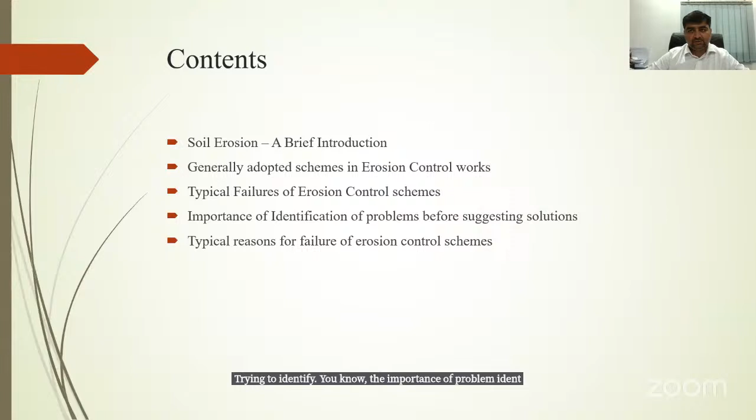So I'll be briefing about soil erosion in the beginning, and we'll be focusing more into the technical things, where we'll be discussing the different reasons for soil erosion, what are the different generally adopted schemes for erosion control mainly in India, then we'll be discussing a few cases of typical failure of erosion control schemes that we often observe in our projects. Along with that, we'll be trying to identify the importance of problem identification before we suggest any kind of solutions, and will also be focusing on the typical reasons where erosion control scheme measures taken on a project generally result in failures.

So we'll start with the basic things, like what is soil erosion. As you can see in the picture, it's a process where detachment and transportation of soil particles occurs by different agents such as wind, water, and gravity. In general, soil erosion occurs due to one or a combination of wind and water, typically in the case of embankments, where due to soil erosion, soil mass is lost from the embankment, detached and transported to other locations, which results in the formation of gullies and cuts into the embankment. This gives birth to a newer geometry which might not be stable to the projected planning, and that might result in overall slope failure. So this is the brief about soil erosion.

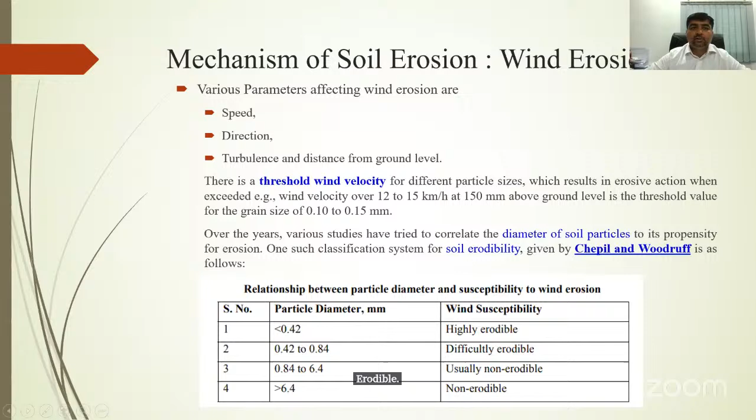Now, the mechanism of soil erosion is crucial in case of wind erosion. Typically, there are three modes of soil transportation: saltation, surface creep, and suspension.

In case of saltation, when you have uneven surfaces and turbulent airflow, the air tries to lift the particles, involving bouncing and jumping within the air. Surface creep involves slow movement of soil surface particles. Typically, in both saltation and surface creep, the range is 50 to 500 micron, that is 0.05 to 0.5 mm. Whereas in suspension, the particles themselves move with the air mass, and the particle size is typically 0.1 mm.

Whatever I'm presenting here is based on the RDSO guideline for erosion control, so I'm taking direct reference from that literature. I'll be sharing different available literature in the Indian context.

Coming back to erosion using rain. Rain erosion is where rain droplets, during precipitation onto the slopes, cause transportation of soil particles due to rainwater. When rain droplets fall onto the top of the slopes, they tend to remove or loosen the soil particles, resulting in movement of the soil particles.

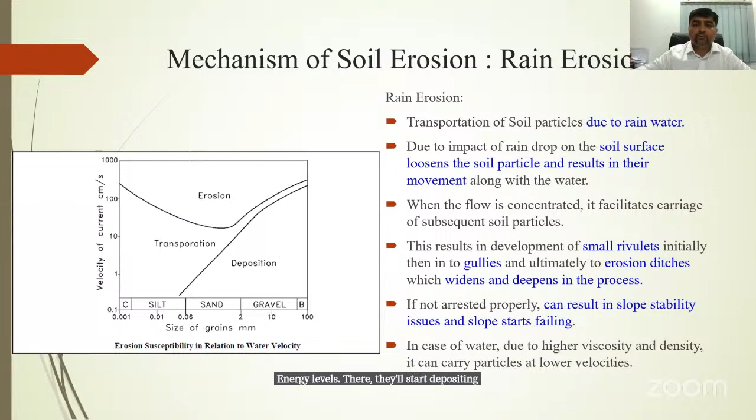So this is the basic about rain erosion. When we talk about rain erosion, we can divide a particular slope into three phases. First phase is the zone of no erosion virtually, expected not to erode because you have a front portion with a good amount of soil mass present. The middle portion would typically be the zone of active erosion. Whatever erosion occurs in this zone gets deposited into the next zone, and if continuous rain is there, the soil mass after deposition can move along with water into the nearby channel. This process typically continues as long as the erosion phenomenon continues. So this is about soil erosion.

Now soil erodibility is one of the major concerns. Soil erodibility is nothing but the susceptibility of a given soil to erode under the given erosiveness of the rainwater. If we have a low intensity rainfall, the droplet diameter would be around 1 mm or less, and the kinetic energy through which erosion occurs would be very less. However, when the rainfall intensity increases to a great extent, say 100 mm per hour, the energy goes from just 2 joules per square meter per hour to around 3000 to 4500 joules per square meter per hour. This is the critical factor.

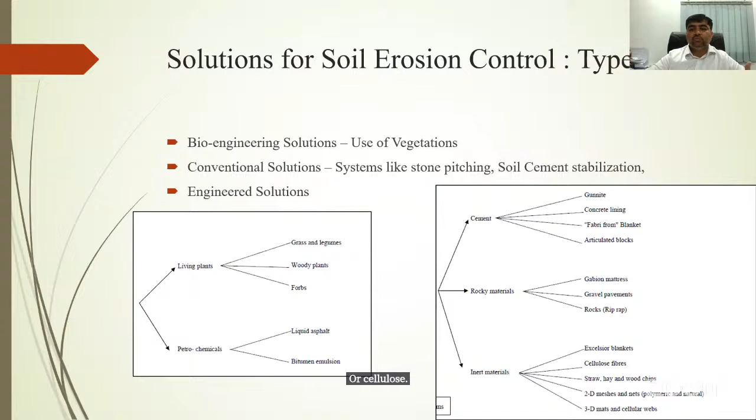There are a few inert materials which can be used, like 2D mesh or net or cellulose fibers. So those kinds of inert materials can also be used for erosion control schemes.

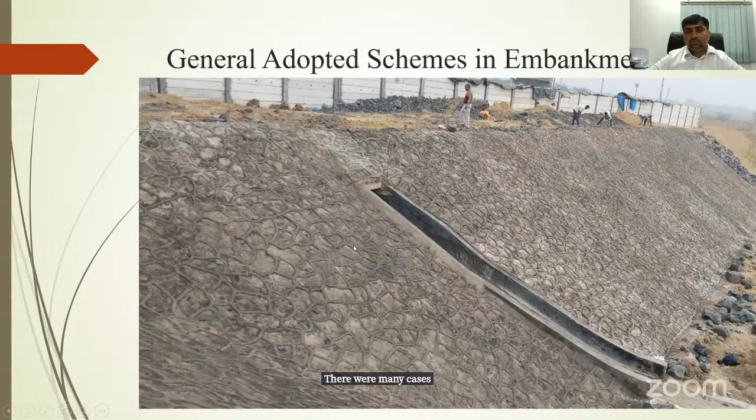So some of the generally adopted schemes, as we all know, include a kind of cemented pitching, which was used. There were many cases where probably this would not be suitable; we'll be looking into one of the case studies. Then you can have the vegetative facing, where we can have this kind of embankments.

Then we can have embankments with typically long slopes onto a landfill. I have taken this photograph just to demonstrate that we can have the coir mats which can be laid over the slope, or we can have the geotextile laid over the slope, or we can have the geomats laid over the slope.

When the slope is steep, we can probably go with the geogrids to make the slope stable. When you have any kind of vegetation, and when your slope stability is a concern, definitely you'll have to go with the engineered solution. So this is one of the options that we can take.

Nowadays geocells is also one of the common techniques being used in India. But unfortunately, when these are placed, many times failure occurs due to various reasons. One is, when you have very steep slopes, the soil gets eroded, and the geocell becomes empty on the top, and that kind of thing occurs many times within geocell. You will have connections, tie clips would be there, which would get detached, and a complete portion of geocell would get washed away in that way. So those kind of issues are there. I hope soon those things would be either addressed or replaced with some other technology.

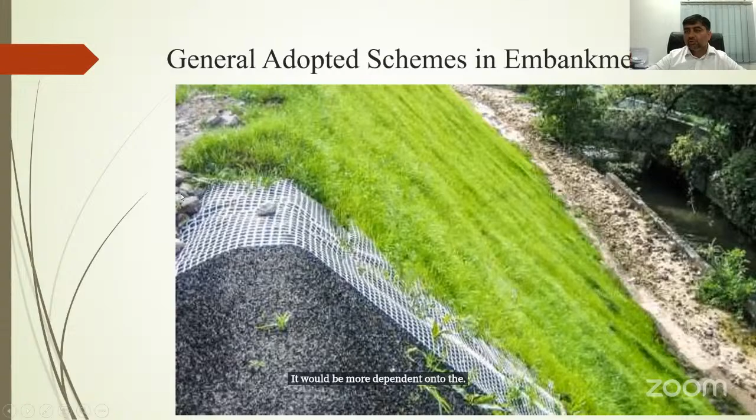These are typical gabion mattresses, you can say, which are being used, which are being adopted.

Now we'll be looking into a few of the typical failure cases where erosion control schemes were adapted, but due to one or more reasons, the applications were not understood properly. Even though a good amount of pitching was done here, this is a typical case somewhere down in south where this kind of closed pitching was done. There was nothing wrong with the technique that was adopted. The only thing was, it was understood that the slope is one vertical to 2.5 horizontal. Material used was typically core was clay.

Then you had a kind of sandy material on top of the core, and then this pitching was done. So this should be stable. And if you are doing basic engineering, not doing anything else, probably that slope should be stable. But whenever you are using anything within it, you have to be very, very careful.

In order to make this particular slope stable - this was an STP plant, so this was the lagoon of the sewage treatment plant. They wanted to make it impermeable. When you are trying to make it impermeable, typically the available option is, let's say, geomembrane. When you're using the geomembrane, you have to be very, very careful, because in this particular portion, they had clay at the base, then they installed geomembrane, then they again placed the clay.

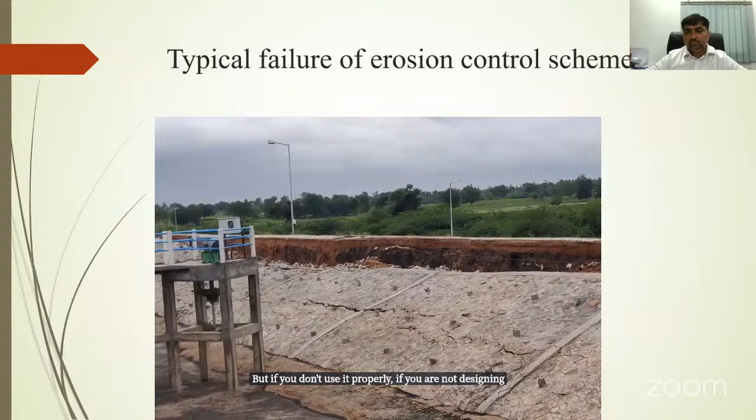So practically they made it a kind of zero friction value at the interface of geomembrane and clay. And when you do that, whatever erosion control scheme you are making is of no use, because in principle you have made this embankment in such a way where it can simply slide onto the geomembrane itself. So geosynthetics, which we use, is definitely one of the best materials or best technologies we have. But if you don't use it properly, if you are not designing for the purpose, it could result in failures.

So this is again the same project at a different location. This was the central one that was on the end - this was at the edge, and this particular photograph is at the center. This is the center bund. And again, you have the failure of riprap. You have a huge settlement. You have almost sliding along this line.

When we say we're designing an erosion control scheme, the point I want to make is that erosion schemes often come in combination with other schemes. It's not just erosion. If we talk about slope stability, if you have a slope of 1 vertical to 1.5 horizontal, typically practiced in India in highway projects, that's about 33.5 degrees. If the material you're using has a friction angle of, say, 31 degrees, and you place it at 33.5 degrees, in principle, for cohesionless soil, that has to fail. You cannot prevent failure even with geosynthetic solutions if the slope interface itself is not stable.

In most highway cases, people simply use geocell and put in material with a high phi value, say 30 degrees. In most of these cases, the whole erosion control system suffers and gets washed away.

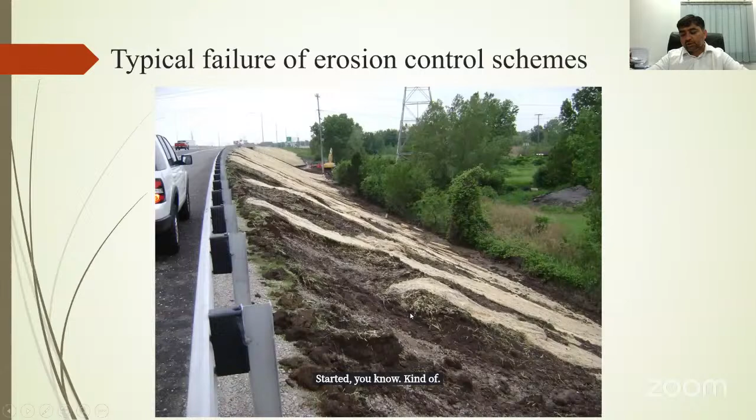Now if we look at this photograph, we have to understand that this failure has occurred. The probable reason for failure of this roadway is erosion. But can I put any kind of erosion control scheme just to make sure it's okay? You can see they had this earthen flat portion available, then the slope. This was the original scheme, which had ample vegetation.

But within this zone, we need to ensure there is a proper retaining system. The slope was steep, so it has to be stable. If you don't have a stable slope and you construct something on top of it, you're obviously going to end up with this kind of accident. That's where we need to understand the importance of identifying the proper problem and then suggesting the proper solution.

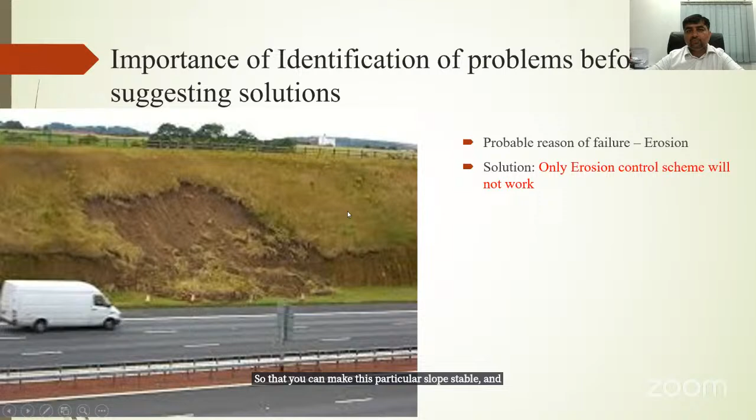This is another similar case where the highway is there with a good amount of vegetation already present. There's another small boundary, and because this slope is steep, this portion gets washed away during erosion. We have to understand that this mass might not be stable with just vegetation. You need some kind of reinforcement within this zone to make the slope stable, so it's good enough for its serviceability life.

Again, this is one area, one portion, where you can see vegetation in the nearby area on this side and that side. This is a quite gentle slope in a way. But when you have this kind of valley on the other side and this kind of curvature on both sides, they have probably met at this embankment. When you have this kind of embankment with a valley on both sides, you cannot have a normal embankment design.

You have to go with some kind of proper analysis for the slope stability, for proper toe protection, erosion control scheme. Only an erosion control scheme is not going to work in this kind of system. You have to be sure you involve an expert in your project.

The main pain contractors have nowadays is whenever they have this kind of embankment, they'll say they have done everything perfect - executed the work well, the surfacing is good, everything is very well. But because of erosion control and maintenance issues, they are always suffering, and LD is being imposed onto the contractors just because they have not done the proper erosion control scheme. Probably they involved some designers or experts, but those experts might not have considered the severity of the region they are dealing with, or the expected conditions. If they are not considering the application properly, they'll end up with these kinds of issues.

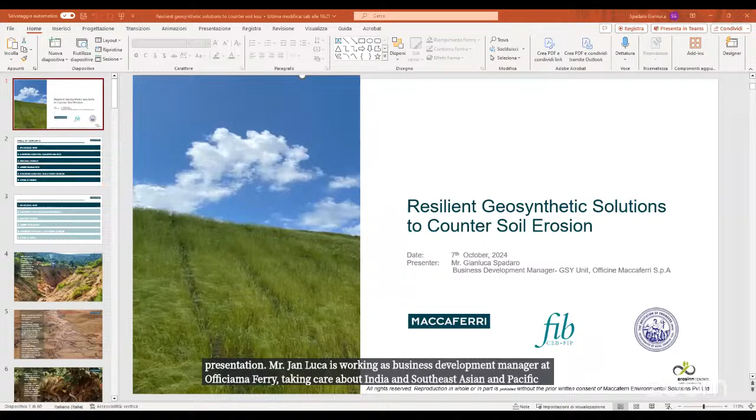Thank you for the introduction. Let's go ahead with our presentation. We will focus our attention today on erosion induced by rainfall and consequent runoff. We are not touching wet application. It means erosion induced by water flow.

After a brief introduction on soil erosion process, we will recap briefly the different types of geosynthetics used in erosion control applications, included in the relevant ISO norm, ISO 18228 part 8, to have a quick look onto our range of solutions. Then we will go deep into the research commissioned to the University of Milan and other research carried out over the years by our company, in order to identify the relation between erosion control products and vegetation growth, and to identify the main factors affecting vegetation success on slopes.

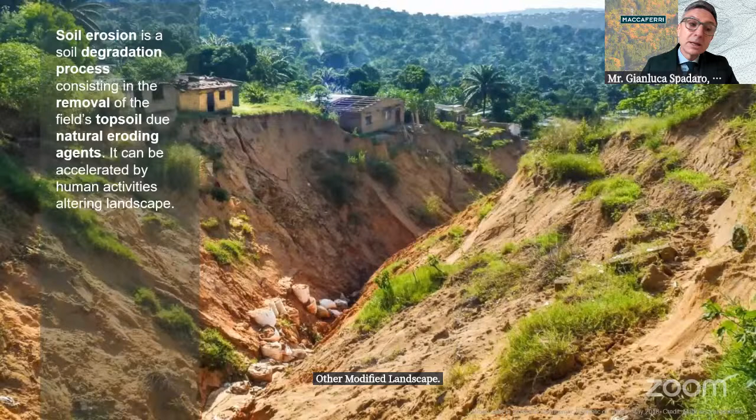Soil erosion is a soil degradation process, as has been mentioned before, consisting in the detachment of the topsoil due to the action of natural forces. Once detachment occurs, soil particles are then transported away. Natural erosion occurs typically on a geological timescale, but when human activities modify the landscape, the erosion process can be greatly accelerated.

As mentioned before, we will focus our attention today on rainfall and runoff induced erosion. Water and wind are the two most common causes of soil erosion. Rainfall may generate the displacement of soil particles close to the soil surface due to the impact of raindrops, and runoff can cause the carving of small rills and channels on erodible soil. Finally, strong winds may bring fine soil particles into suspension and cause movement by bouncing and rolling of coarser particles.

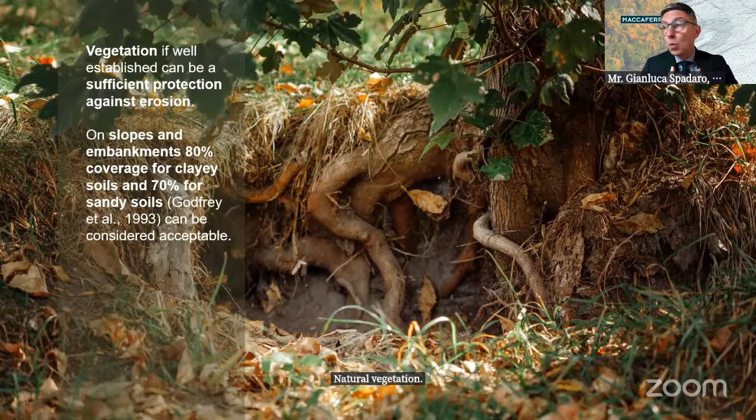Natural vegetation, if well established, is usually considered sufficient protection against erosion. Vegetation coverage is typically able to protect topsoil from the action of eroding agents, and plant roots are capable of holding vegetative soil in place, preventing it from being blown and washed away. Based on literature data, a vegetation coverage of 80% for clayey soil and 70% for sandy soil can be considered acceptable protection against erosion processes on slopes and embankments.

The requirements in terms of vegetation coverage mentioned in the previous slide may be difficult to reach on site. And even if reachable, there is anyway a time window until the full development of vegetation, during which the soil is at risk of erosion in case of intense rainfall. A paper from Rickson and Loveday reports that the full establishment of vegetation may require one or two growing seasons in temperate climates, even longer on harsher sites. In tropical conditions, full revegetation on a slope may take considerably less time.

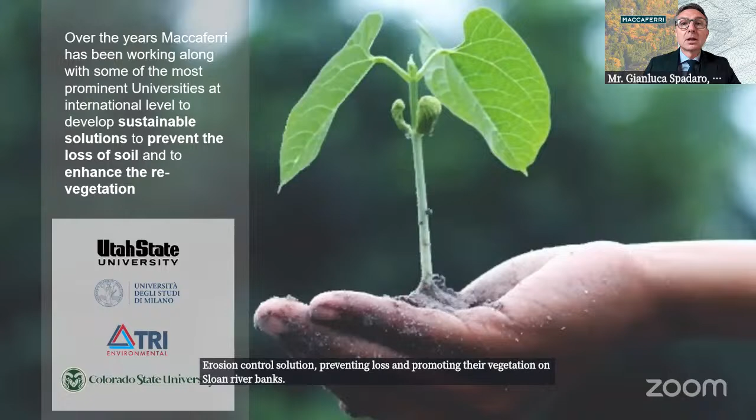That's the reason why erosion control products made from synthetic or natural organic fibers are frequently used in protecting slopes from erosion and creating favorable conditions for the establishment and development of vegetation. Over the years, our company has been cooperating with some of the most important universities and testing institutes to develop sustainable erosion control solutions, preventing soil loss and promoting revegetation on slopes and riverbanks. Along the presentation, we will go through the most relevant research and studies.

Let me go through quickly the classification of erosion control products according to the relevant ISO norm, ISO 18228 part 8. Geosynthetics addressed to erosion control applications can be classified mainly based on product configuration, and then we may have GeoMat, GeoGrid, GeoWeb, and woven material in form of sheet material.

Raw material can also be classified based on the raw material from which they are made, and basically erosion control products can be classified based on natural fibers, typically jute or coir are the most commonly used raw materials, or artificial synthetic fiber, typically polypropylene, polyethylene, and polyamide. Finally, geosynthetics used for erosion control applications can be classified based on the duration of the protection against erosion, as permanent or temporary. So it means it can be classified under permanent erosion revegetation materials, PERMs, or temporary erosion revegetation materials, TERMs.

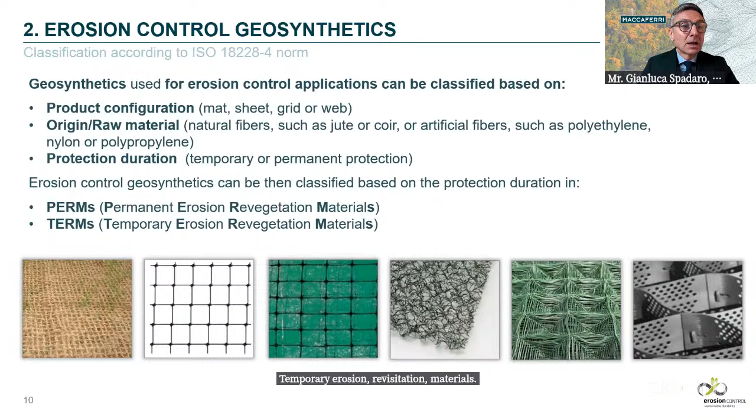Let's focus attention on the permanent one. Permanent erosion revegetation materials provide permanent protection against erosion, being manufactured using synthetic material, as we have seen before.

To avoid any misunderstanding, when we refer to the permanent action provided by PERMs, we refer to the action that can be provided by this type of material when properly filled with topsoil and shielded by the vegetation from the degradation due to UV radiation.

PERMs provide permanent protection against erosion, provide support in vegetative growth, creating favorable conditions for the development of vegetation, and if well entangled with the vegetation, this provides also a reinforcement of the root system in terms of improvement of the shear resistance.

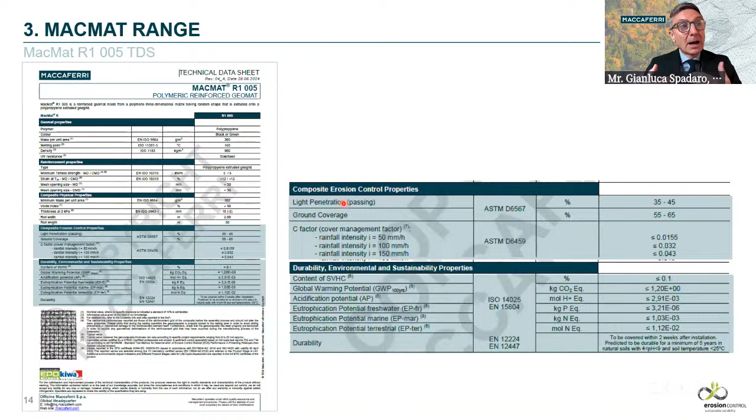Ground coverage is something correlated to light penetration, because you can understand easily that an open material may provide a high value in terms of light penetration, ensuring the passage of a big portion of UV radiation, but at the same time, an open material may have a limited ground coverage and then a limited capability to protect the slope from erosion. So a proper balance between light penetration and ground coverage would ensure the best performances in terms of erosion control.

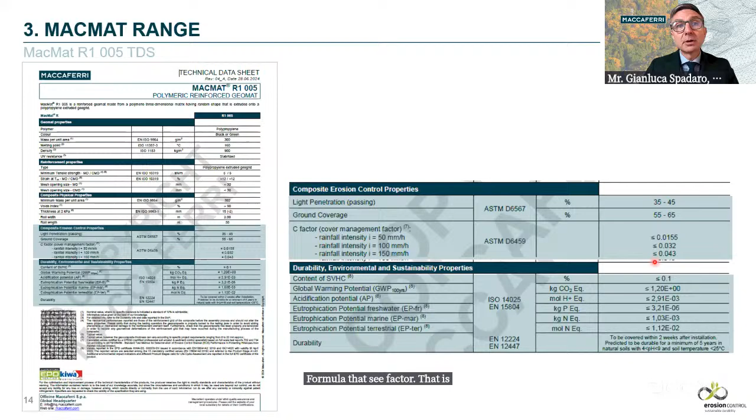And then we will see later, when we go through the RUSLE formula, the C factor that expresses the capability of the material to protect the slope from the erosion induced by rainfall and runoff.

And then finally, we will have also the environmental performances, since we are called to develop solutions that are sustainable under an environmental point of view. The environmental performances of our solutions have to be independently verified and provided under an environmental product declaration.

There's a document communicating in a transparent and comparable way the information about the life cycle environmental impact of the product according to the relevant international standard.

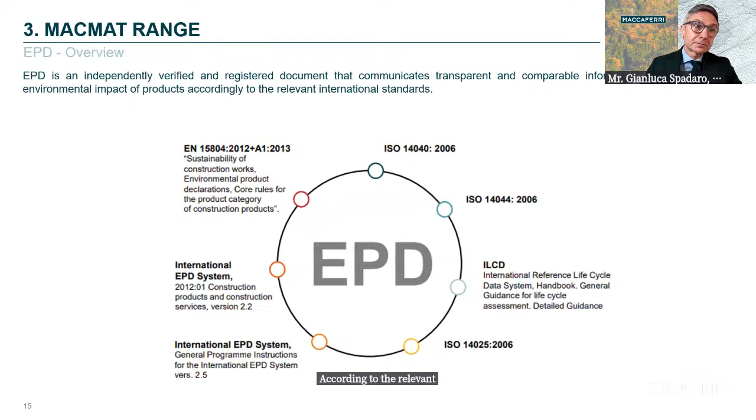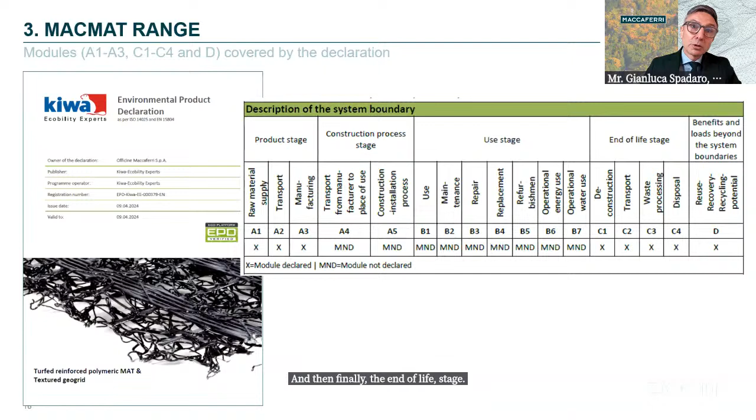That's the environmental product declaration covering our product, providing the environmental impact of the product, referring to the production stage related to raw material supply, transportation, and manufacturing, and then finally the end of life stage and the benefits and loads beyond the system boundary at the end of the life of the product.

Let's have a quick look into the research we mentioned before, carried out by Maccaferri along the years in order to develop sustainable solutions, preventing soil loss and promoting the establishment and development of vegetation along slopes and river banks. Which are the main factors influencing the establishment and development of vegetation on slope and embankment?

The study identified 7 product-related factors influencing revegetation success, and 4 site-related factors. Product-related factors are light penetration, thickness, color, water absorption, weight, roughness, and uniformity. The site-related factors are albedo, water runoff, soil humidity, and soil temperature.

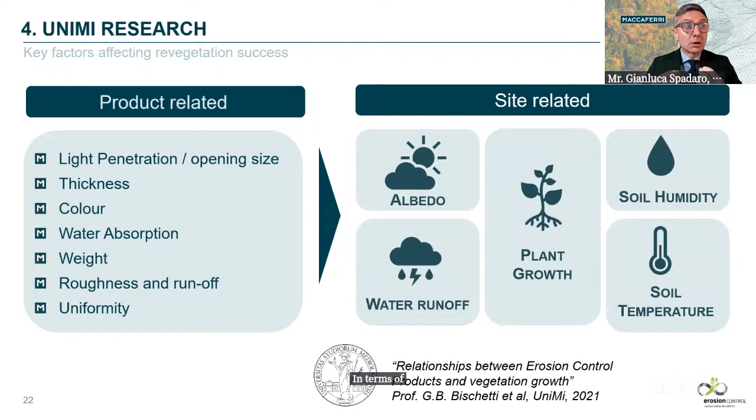The performances provided by an erosion control product refer to complex processes resulting from the interaction of many different factors and features interacting with each other. It's the balance between these factors that provides the best performance in terms of vegetation growth, not the huge value of just one factor.

Erosion control products have been divided along the research into 4 categories: bionets, light geogrids, geomats, and geoblankets, based upon the origin of the raw material and the manufacturing technique adopted for their production.

Bionets consist of bidimensional nets made of biodegradable natural fibers. Light geogrids are the same, but made of synthetic fiber that can be multi-filament or extruded. Geomats, as we discussed when mentioning our MACMAT, are 3-dimensional geomats made of synthetic monofilaments tangled together and welded at contact points, which can be provided as is or reinforced with synthetic geogrid or metallic mesh. Finally, geoblankets are made of natural or synthetic fiber held together by synthetic or natural light geogrid.

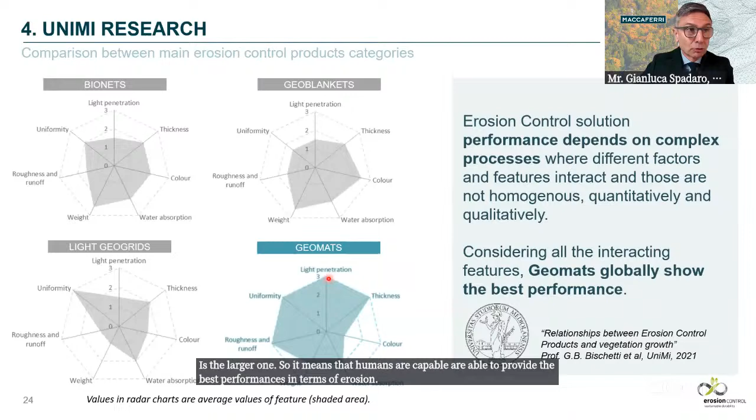Our product falls into the geomats category, but with some differences, all affecting positively the revegetation success. I'm referring to color, since our product can be provided in different colors according to the requirements of the specific project.

As you can easily understand, black color attracts more UV and light radiation, increasing temperature at the interface, instead of light color which attracts less light radiation, reducing the temperature at the interface. Since our material can be provided in light color as well as dark color, it can easily be adapted to the requirements of the specific project, whereas erosion control products like geomats are usually available on the market only in black color.

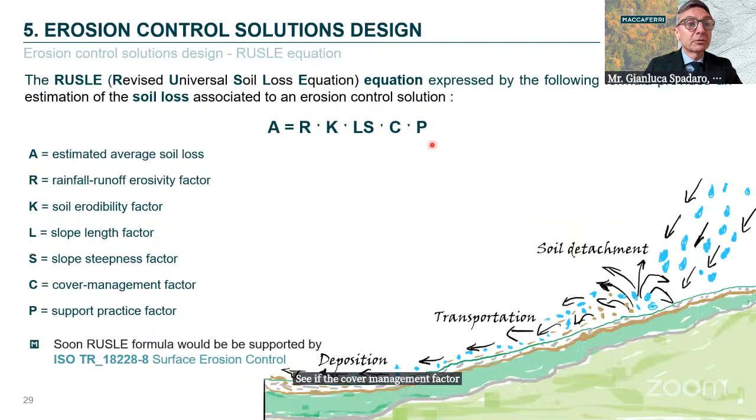The RUSLE equation is expressed by the formula shown in the slide, where A is the estimated average soil loss, R is the rainfall and runoff erosivity factor, K is the soil erodibility factor, L and S are the slope length and steepness factor, C is the cover management factor, and P is the support practice factor.

Let me go through the different factors providing the estimation of soil loss according to the RUSLE equation. R is the rainfall runoff erosivity factor and depends on local and regional rainfall.

The R factor value can be estimated strictly based on local regional pluviometer readings. However, there are many empirical formulas available based on statistical analysis of many years of pluviometer readings, and in some cases validated through direct erosion measurement, providing an evaluation of the R factor.

K is the soil erodibility factor and expresses the tendency of the soil to be eroded, depending on the soil texture - meaning the different percentages of clay, silt, sand, and gravel - and the soil hydraulic conductivity. As for the R factor, the K factor can also be evaluated using empirical formulas.

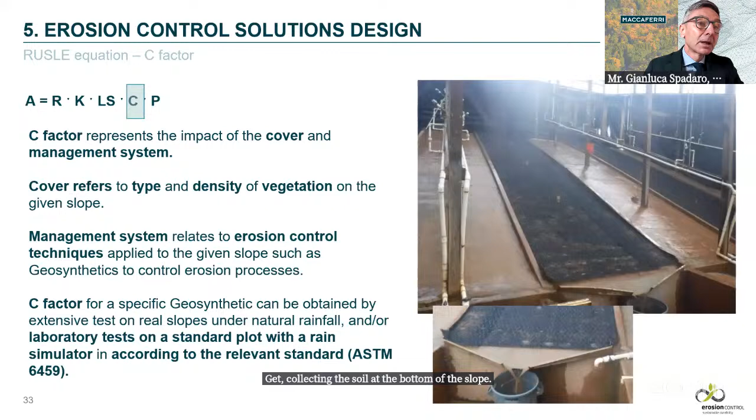P, finally, is the support practice factor, reflecting the impact of landscaping and agricultural practices adopted to reduce the erosion potential of the runoff, such as contour farming, strip cropping, and terracing, which may modify the flow pattern, direction, and volume of the runoff. The support practice factor P is typically taken equal to 1 in a construction project to remain in a conservative position.

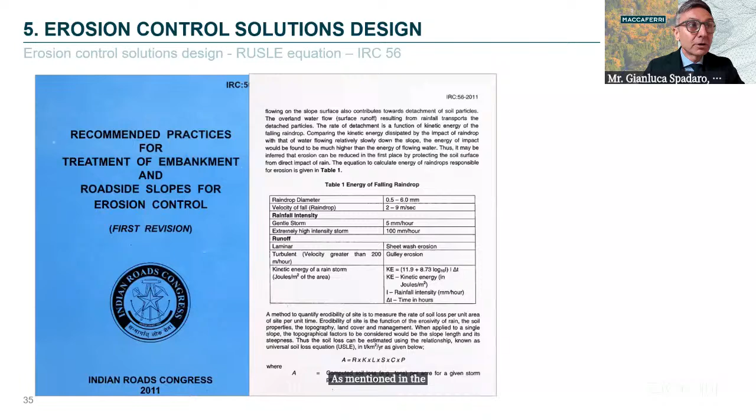As mentioned in the previous intervention, this approach is nothing new for Indian standards, as it's already mentioned and included in IRC 56 as an evaluation of soil loss.

Just to give you a brief indication about the soil loss connected to an unprotected slope or a slope protected with our MACMAT, referring to a fill slope having a length of 20 meters and inclination of 30 degrees, taking into consideration a duration of 1 year, the erosion evaluated in terms of soil loss, tons per year, would be...

570 tons in case of an unprotected slope without any protection on top, and in the case of the same slope but protected with our MACMAT R1005, the soil loss would be considerably less, a little bit more than 14 tons. You can see the huge difference between the two values.

This approach is already implemented in our EcoMac design, part of our eDesign platform, evaluating the soil loss and also the stability of our product, MACMAT, on slopes and riverbanks.

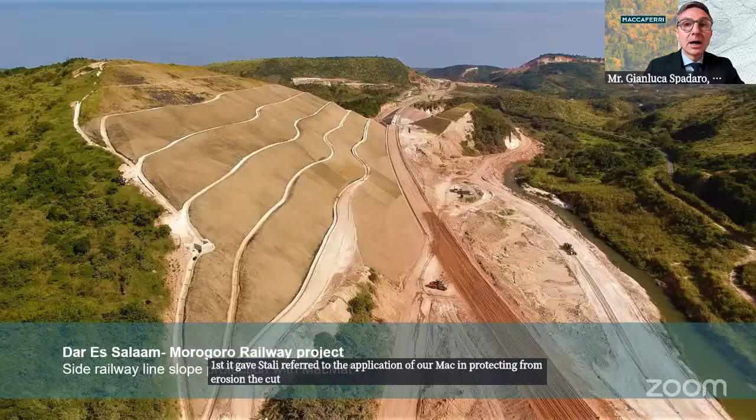The first case study refers to the application of our MACMAT in protecting from erosion the cut slope along the railway connecting Dar es Salaam and Morogoro in Tanzania. This was the first section of the line connecting Tanzania and Congo, passing through Uganda and Rwanda, to give them access to the Indian Ocean.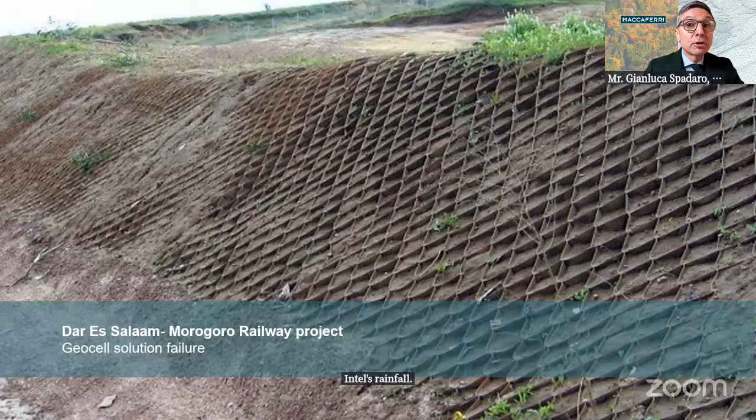The original solution proposed by the contractor's consultant to protect the cut slope from erosion was based on geocells. The slides show the failure of the solution tested in a dedicated area, with the geocell exposed, partially empty, and without any development of vegetation on top.

If the slope inclination, indicated as alpha in the slide, is lower than the angle of repose of the soil, provided the application of an adequate erosion control product on top of the geocell to protect the infill material from the action of the eroding agents, a solution based on geocell may work properly.

Instead, if the slope inclination is higher than the angle of repose of the infill soil, as soon as the slope is subjected to the action of the eroding agents, the infill soil will tend to accommodate to its natural angle of repose, leading to the failure of the solution based on geocell. That's the reason why the solution originally proposed by the contractor failed.

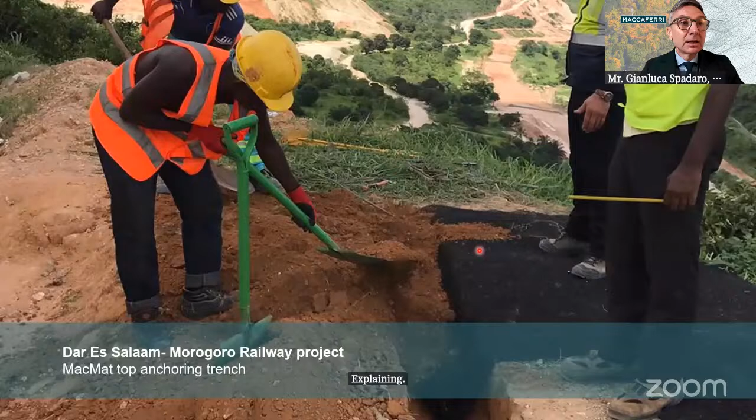Here we have some pictures related to the installation of our MACMAT, starting from the anchoring trench on top, which can be done by excavating a small anchoring trench, or anchoring can be done by the application of an adequate number of steel pins, like the J-pin shown in the slide.

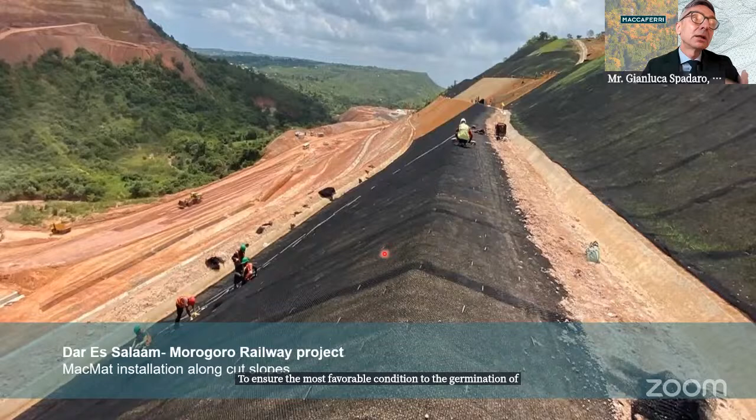Then the mat has to be properly installed on the slope, taking care to ensure tight adhesion between the geomat and the soil, to create the most favorable conditions for the germination of the seeds and the development of the vegetation.

Again, a picture related to the installation of our MACMAT reinforced with the DT mesh on a steep slope. Then finally, the hydroseeding carried out using a specific mix of seeds defined according to the project site conditions, such as exposure, precipitation, and light irradiation. And then the results on the slope some weeks after.

I think, again, self-explaining. Let me pass to another case history of a project done in Russia, again protecting the side railway line slope with our MACMAT.

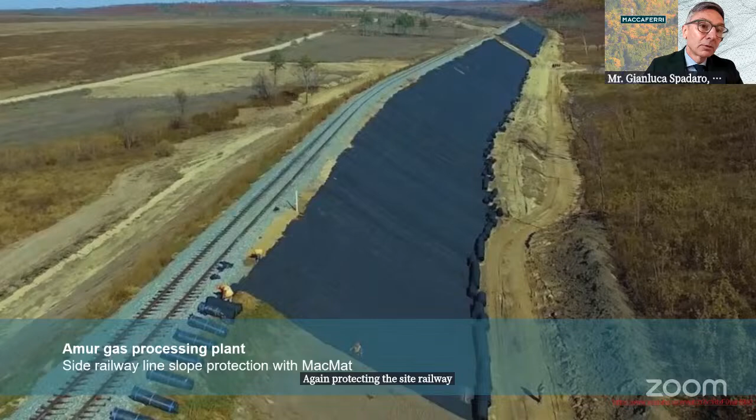Let me... sorry. Okay, let me show a brief video giving an overview. Oh, something went wrong. Let me see if... now it's working properly.

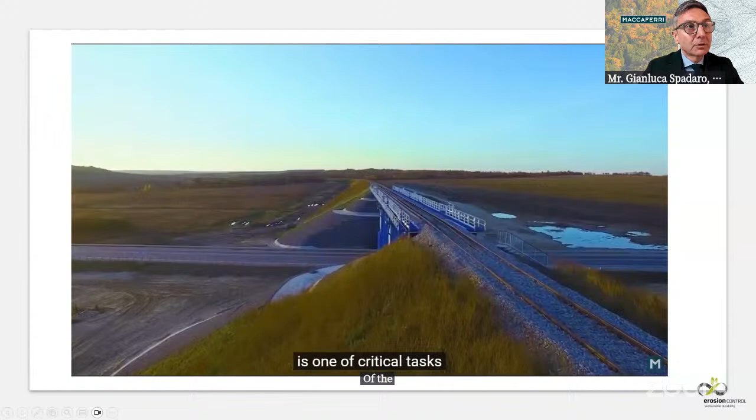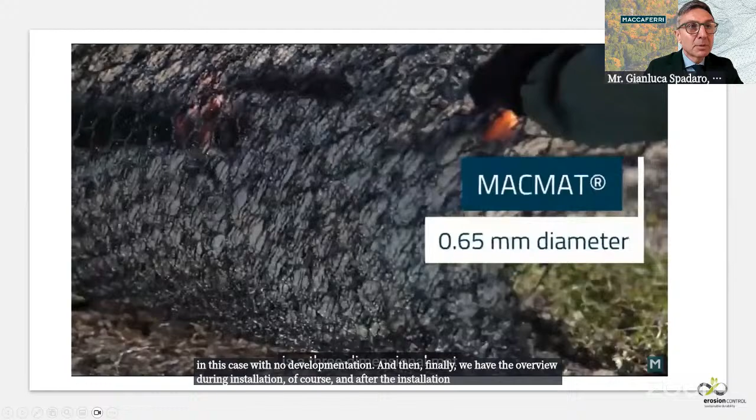Yeah, the video provided an overview of the project. You can see the side slope of the railway before the intervention, in this case with no development of vegetation. And then finally, we will have the overview during installation, and after the installation, with the same slope protected with our MACMAT.

In this case, our MACMAT reinforced with the DT mesh has been used, due to the inclination of the slope, according to the indication that we have received from the consultant involved in the project.

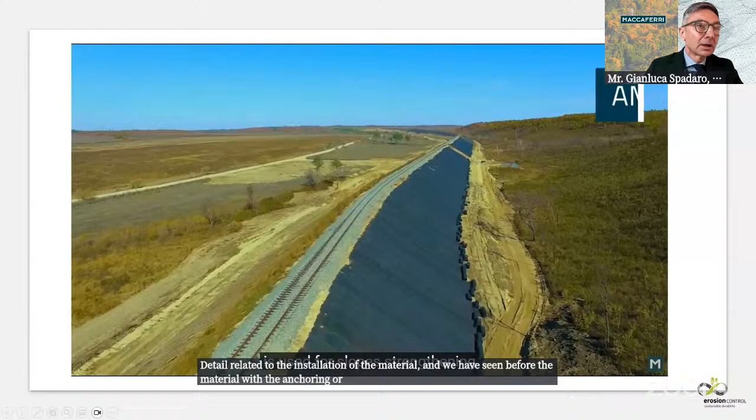There's some detail related to the installation of the material, as we have seen before, anchoring the material with the anchoring trench or with some J steel pins.

The railway line has been constructed in order to connect this gas plant and the Trans-Siberian line, in order to get the different parts of the plant transported on site. That was really important to ensure that the railway will not suffer from any issue correlated to the erosion of the side slope.

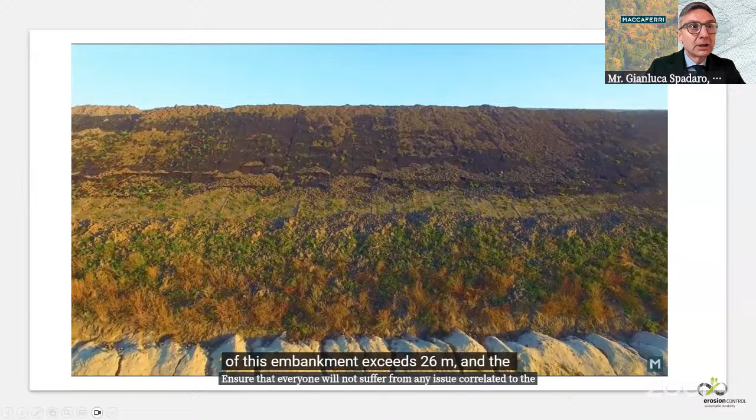Length of the slope was more than 50 meters, in some cases with a height of more than 26 meters. That's the reason why our MACMAT reinforced with the DT mesh has been used.

This is something related to the production of the material. Again, the installation - the material has not been hydroseeded, but just covered with topsoil.

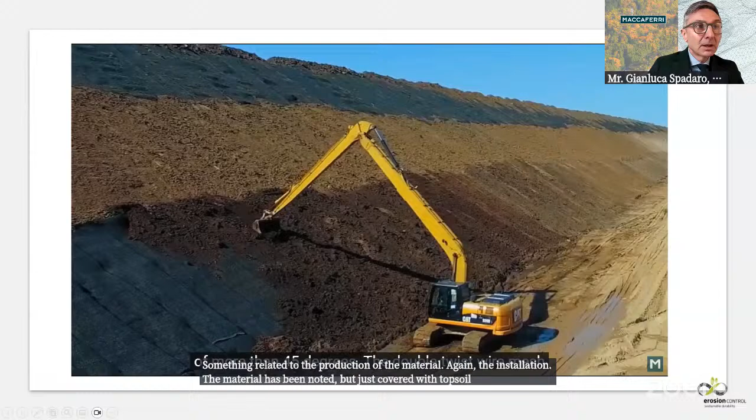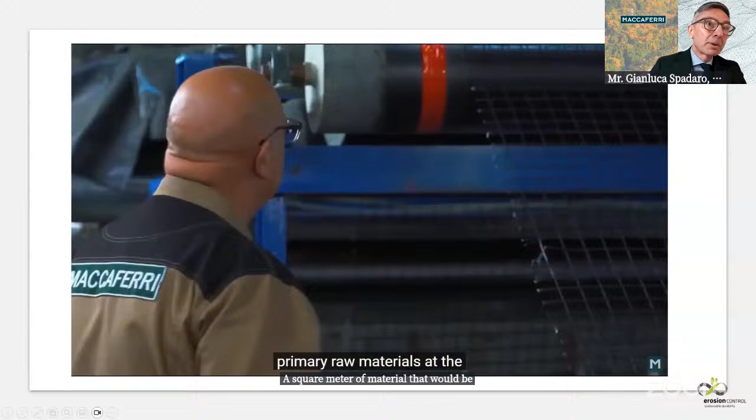The project involved the installation of more than 640,000 square meters of material that has been produced in our plant in Russia. Then the material has been, as you can see - this is the package of the material - protecting the material from degradation due to UV radiation.

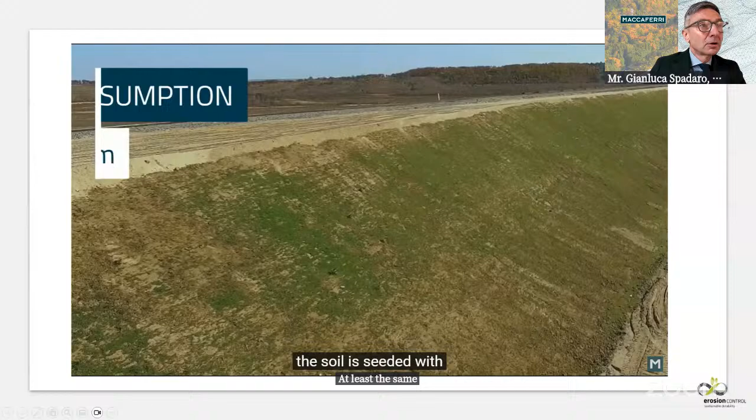The installation of the material typically requires 4 or 5 workers in order to cut the material and install it properly along the slope. Taking care about the shaping of the slope, at least 10 centimeters of cover soil has to be removed and then shaped in order to ensure a proper base for the installation of the material.

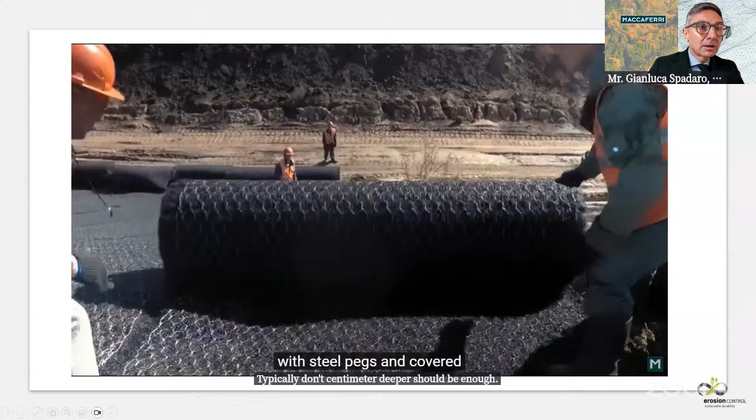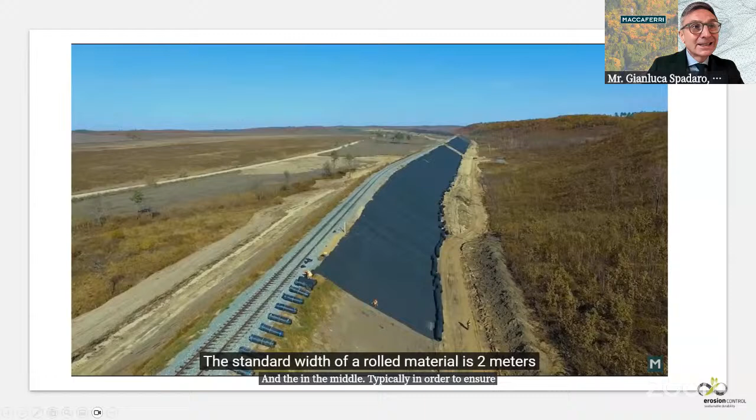As we have seen before, the anchoring trench on the top, typically 30 centimeters deep, should be enough. Then the rolls are installed along the slope in order to ensure continuity between adjacent rolls. Material needs to be properly pinned on the edges and in the middle, typically, in order to ensure a tight adhesion of the material along the slope, ensuring proper conditions for germination of the seeds and development of vegetation.

Typically, production is between 3,000 and 5,000 square meters per shift, according to the setup I've shown before, requiring between 4 and 5 workers per shift.

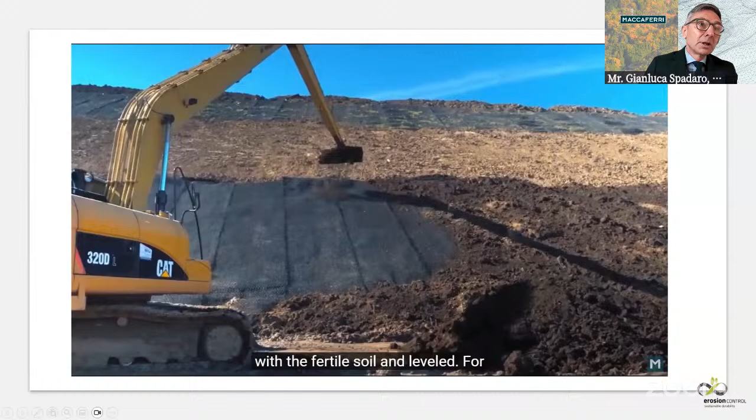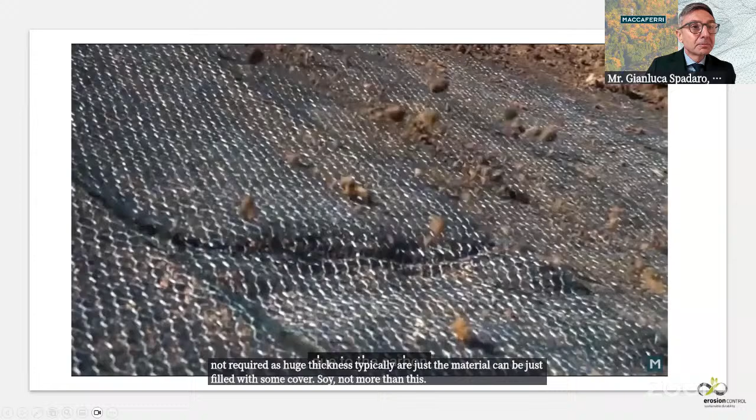In this case, material has been covered with 30 centimeters, but typically such a huge thickness is not required - just the material can be filled with some cover soil, not more than this. The material is added with carbon black in order to stabilize it during installation, but to provide long-term performance it needs to be covered with topsoil and shielded by vegetation.

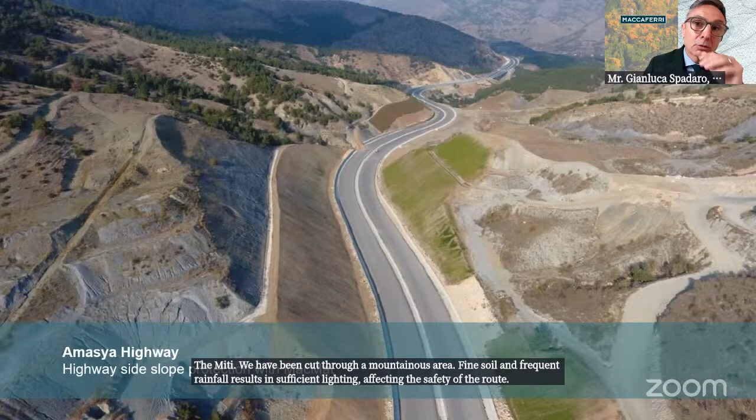Then let me close with a case history related to the protection of the side slope of the Amasya Highway. We are in the northern part of Turkey. The Amasya Highway has been cut through a mountainous area. Fine soil and frequent rainfalls result in superficial sliding, affecting the safety of the route and forcing authorities to close the road from time to time for cleaning.

There's a picture related to the installation of the material. Before we have seen MACMAT in black color; instead here we have material available in light brown color, in order to moderate the increase of temperature due to UV radiation, which is particularly high in this region.

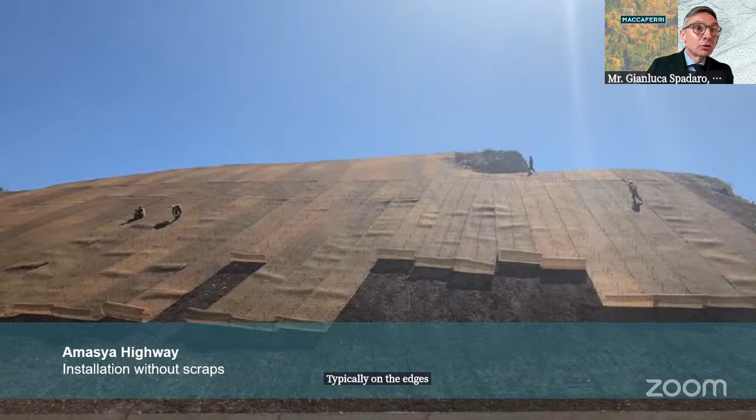Then the installation of the material, putting the adhesion rods and pins typically on the edges and in the middle, in order to ensure a tight adhesion between the material and the soil and the slope. And finally, a picture related to the first phase of the revegetation of the slope after the hydroseeding process.

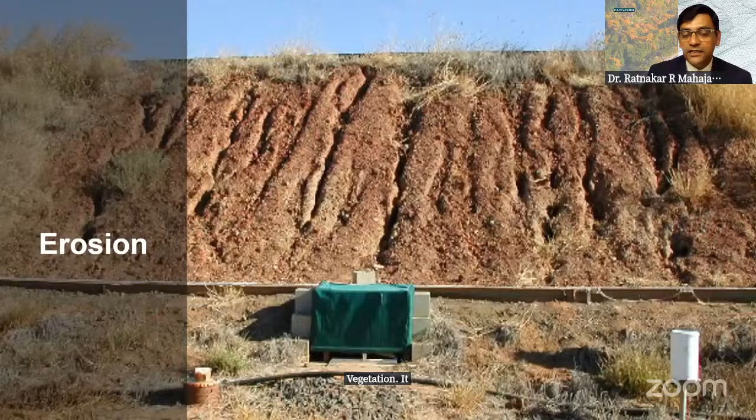Of course, soil erosion is a natural process, as Himanshu and Jaluka explained, occurring because of the detachment and movement of topsoil, which could be due to wind action or flowing water. Due to not proper or timely attention, these issues can accelerate and erosion can happen.

There have been instances where embankment slopes, irrespective of the type of soil used, have suffered a very high degree of damage. As Himanshu explained, various types of soils exist, and the type of soil is related to the amount of resistance it provides against erosion.

When you provide erosion control, the main objective is to protect embankments, whether it's road, railway, or any other infrastructure, so that it continues functioning and permits uninterrupted service related to traffic or design speed.

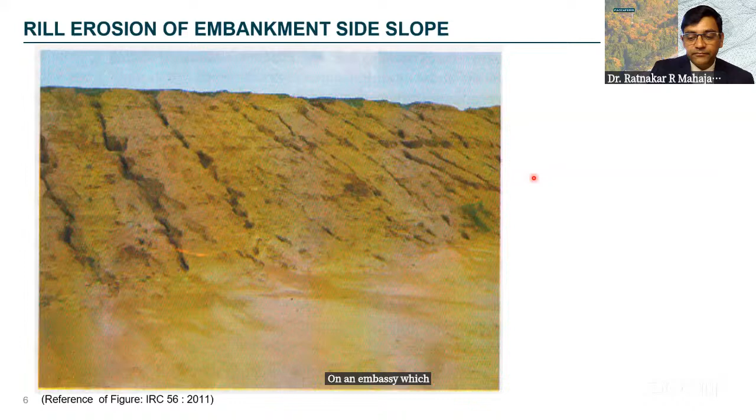Some photographs from the Indian Roads Congress 56 document show the formation of rill erosion on an embankment subjected to very high rainfall, and these rills can even further develop into deep gullies. This formation of rills or deep gullies is related to raindrops.

When a raindrop falls, it comes with certain kinetic energy, causing splashing of the raindrops, or it can roll down as a sheet flow of water. The velocity of water increases along the slope, increasing the drag force on the soil particles.

If adhesion or the cohesion between particles is less than the drag force, then the soil particles also try to move along with the water, and detachment of soil particles happens.

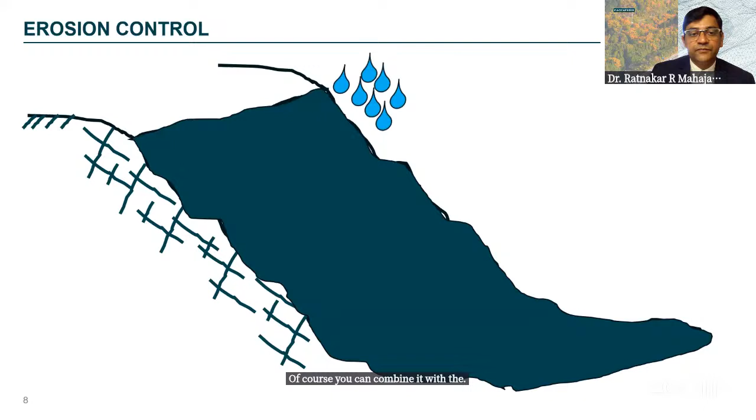To prevent erosion, one of the advanced methods is providing erosion control mats. Of course, you can combine it with hydro mulching. So typically, this is the issue you have: formation of rills or gullies.

Another issue is when you have embankments which are flooded during certain parts of the year, or throughout the year, then you may have erosion at the toe or at least in the area where the flood water touches the embankments. Or you have flash floods, and then you may have complete washout of the embankments.

These gullies are formed on the slope due to erosion, and if you don't provide erosion protection measures on the slope, then you can find such situations, which typically result in deep gully formation.

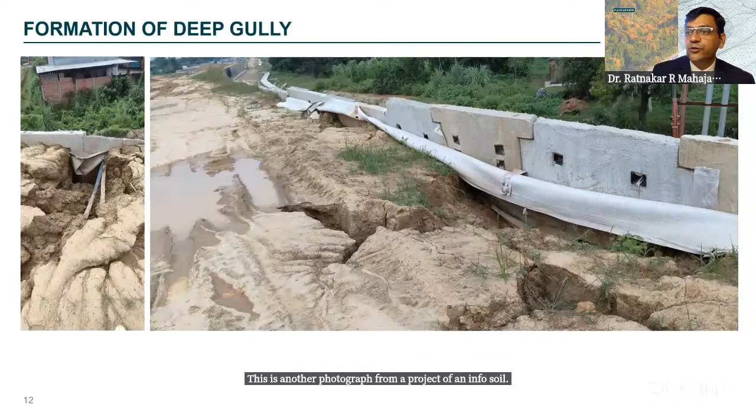So what are the different options of erosion control? Of course, you can have simple vegetative turfing, or you have ready-made grass turf which is prepared and then transported to the site and applied.

However, for big infrastructure works, there is a limitation. If it's a small area, typically in architectural works, you may have lawns being transported. Then it's possible because the area is very small.

Or you can have application of mulch. So you have mixing of water, the seeds, and a special mulch with some binders, and then you spray it.

Or possible solutions are vetiver grass, which is also commonly used. Vetiver grass is known for very deep roots, which can go as deep as around 5 to 6 meters. However, successful establishment of vetiver grass will give you the correct erosion control solution.

Of course, you can have jute or coir nettings, which can help protect the embankment temporarily until the vegetation grows. After the vegetation has grown, over a period of time, these biodegradable materials will biodegrade and also provide manure.

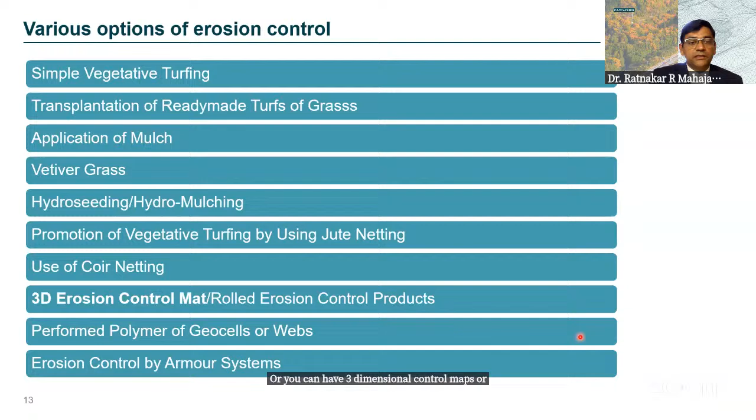Or you can have three-dimensional erosion control mats or rolled erosion control products. You can have geocells, webs, or the armor system.

A very common solution adopted is riprap, where you place stones on the embankment. However, stone is a precious material. Quarrying itself is a challenge, and then you have to transport it. All parts of the country may not have this precious material. The construction of this riprap also requires skill.

Another option is using concrete blocks. Of course, cement is one of the materials commonly used in civil construction. However, cement is one of the major contributors to greenhouse gases. If you research it, you will find how much damage it does. So it's better to avoid using such materials.

Another option could be using concrete mattresses. However, the issues could remain the same. You are using concrete, which contributes to greenhouse gases, and we need to look at sustainable solutions, which are greener solutions.

Or you may use geocells, but as explained, if you use geocells filled with soil, and if they are not covered with proper erosion control on top, and if they are installed on steep slopes, then you will have certain issues.

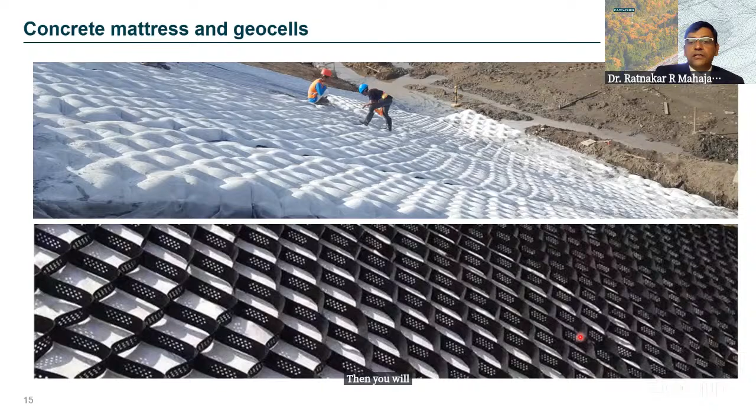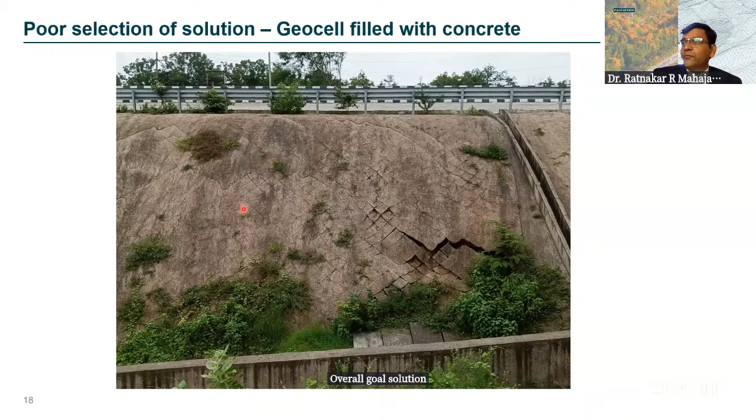So if there is scouring happening below that, or soil erosion happening below that, then the overall solution is not working properly. If I zoom in here, you can see the lines or walls of the geocell, giving a real picture of how the geocell is installed, and the concrete is no longer homogeneous. If you just place PCC itself, that would be more than enough rather than providing geocell filled with concrete.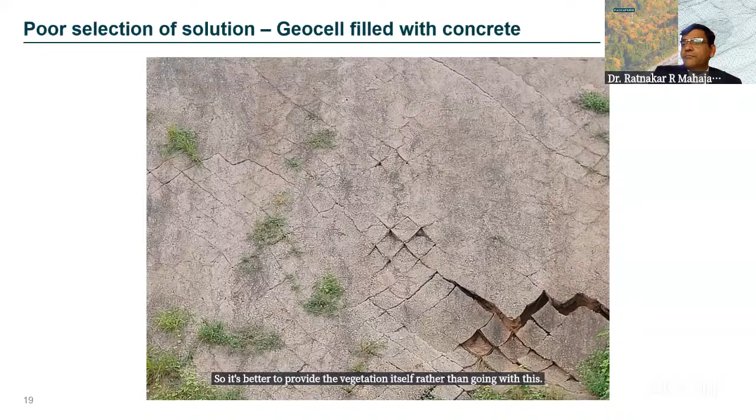This is a close-up view of it, and you can see even the gaps around the soil cells of the geocell are finding ways where vegetation is growing. So it's better to provide vegetation itself rather than going with these fancy solutions.

Jaluka and Himanshu, the earlier panelists, have explained about IRC 56. I just want to talk here about erosion control practice overall. It's okay as a practice - how it works for me, then I will practice it. That's been the overall practice until now. But as engineers, we need to move from work practice to an engineered approach.

IRC 56 talks about soil loss analysis. What it means is, if you have an embankment and rainfall, how much soil will be eroded? Let's quantify that, and then bring up an erosion control measure, and estimate how effective it would be. Then you again estimate the soil loss and compare the estimation without any protection and with protection, and then you get the efficacy of the erosion control measure.

The same document talks about the energy of a falling raindrop, and how exactly the kinetic energy of the raindrop will yield the kind of erosion, whether it is sheet wash erosion or splashing.

The same document talks about RUSLE, the Universal Soil Loss Equation, called the Russell equation - Revised Universal Soil Loss Equation, given by Renard in 1997. As Jaluka explained, the computed soil loss in tons per acre for a given storm period and time interval - tons per acre or per hectare per year, or whatever time period you want. It's typically ton per square kilometer per year, depending on what you want to estimate. In this equation, there are different terms already explained by earlier panelists: R, K, L, S, C, P.

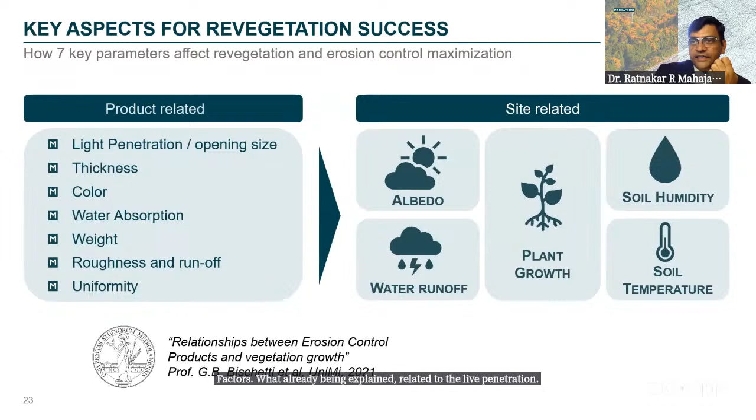A very important part is the C factor, the cover management factor, which can be estimated using laboratory test or full-scale test using ASTM D6459. I don't want to repeat what Jaluka and Himanshu have explained.

I want to show you some Indian case histories where the approach has been an engineering approach. I think it's time we need to practice this Russell equation where you need the C factor, which can be estimated for various erosion control solutions. Then you estimate the amount of soil loss, and whichever solution gives you the least soil loss, you adopt that solution.

This is a project for a client, the water resources department, along the Gandak River. Gandak River, which originates from Nepal, enters India. Here a barrage was being constructed.

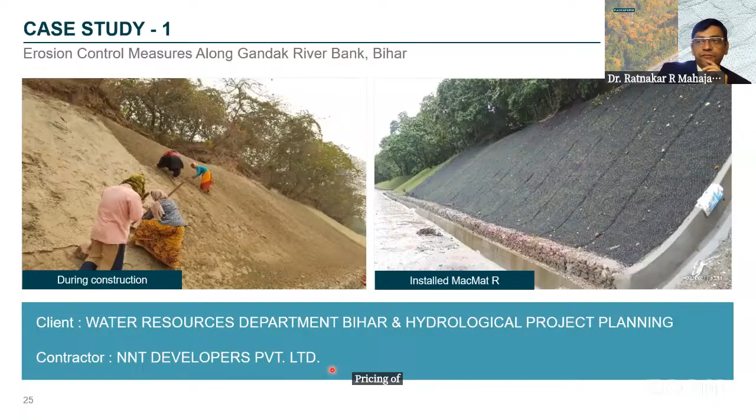Along the length of this river, there were issues related to severe erosion due to flowing water as well as rainfall. In the photograph, you see the embankment portion which is stabilized - the first photograph shows dressing of the slope, the second shows installation of the mat, and this is the retaining wall being constructed along the length of the river.

This is the Gandak River near Valmiki Nagar in Bihar. Due to high flow during monsoon, the left river bank has suffered severe erosion.

Here, reinforced soil walls were provided as a toe, and the reinforced mat was proposed to protect the slope against erosion. Due to the high flow, there was an issue related to the toe of the slope, so the mat solution was combined with hydromulching.

The hydromulching was provided with MacFlex and MacGanics, which are basically soil amendments, combined with MacMat, conforming to the Ministry of Road Transport Highway specification as well as the IRC 56 specification. This MacMat acts as turf reinforcement, creating an environment to develop vegetation and reduce the velocity of water on the slope surface, absorb the impacts of raindrops, reduce the splash effect, and act as a reinforcement for the roots of the vegetation.

Around 19,000 square meters of MacMat was installed. Another project in the state of Rajasthan for a railway embankment, similar to earlier photographs showing formation of gullies. This is the embankment - this was the situation, and you can see the type of soil used for building the embankment. Here, first hydro mulching was done, followed by installation of MacMat R.

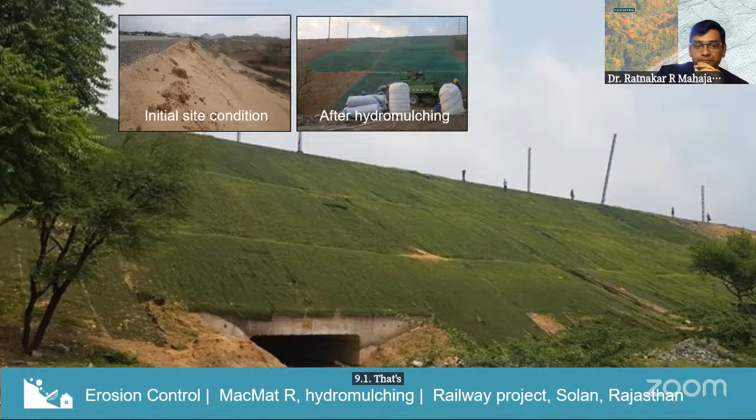This is another project from Northeast Frontier Railway. Here there was a cutting, and on the cutting, fiber mats were installed - you can see the nice establishment of vegetation. However, if you talk about estimating the amount of soil loss, it's difficult to estimate unless you have the C factor. If you do the full scale test as per ASTM, then you can estimate the soil loss.

This is another project done on a railway embankment, where you can see first the dressing of the slope, then watering, then spraying the mulch, then the establishment of vegetation.

This is another project for Northern Railway near Lucknow, where the embankment was required to be protected by any means.

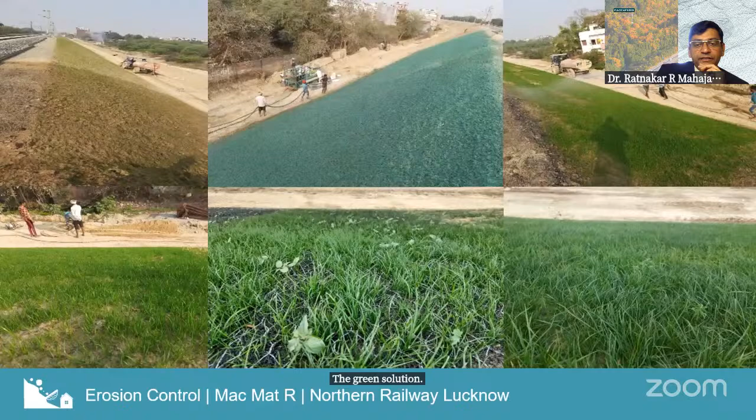So we propose the MAC mats. Here, in the first photograph, you can see dressing of the slope followed by hydro mulching, then watering, and here the MAC mat is being installed. These solutions are not only establishing vegetation but aesthetically pleasing, and of course providing a green solution by absorbing carbon from the environment, making them greener solutions.

These are the approvals from RVNL for both projects. Another project involved cut slope stabilization, where the slopes were cut at very steep angles, 30 to 87 degrees, between the Kerala-Tamil Nadu border at Veliguri section. The slopes were required to be stabilized using nails, but certain portions of the embankment needed to be protected from erosion. Here again, hydro mulching and MACMAT were installed as an erosion control solution.

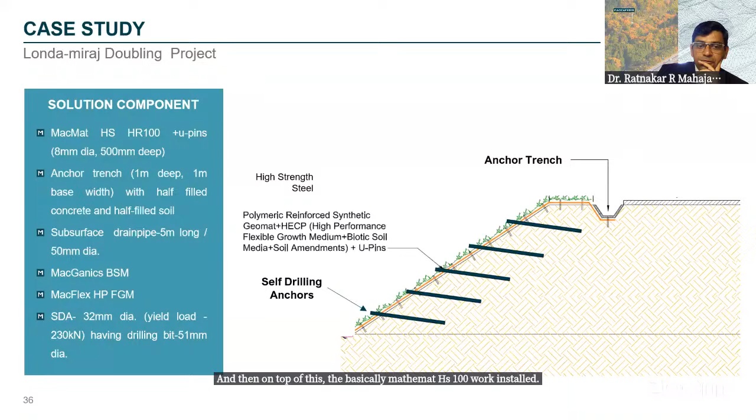Another project was a railway embankment facing issues of surficial stability, where self-drilling anchors were installed. On top of these embankments, MACMAT HS 100 was installed combined with hydro mulching. This is the photograph of the initial site condition, and this is after stabilization of the slope. We are always working side by side with engineers, getting involved from the stage of initial planning to execution, where our experts help in selecting these kinds of solutions.

Very important part, as I said, environmental sustainability we need to understand. Geosynthetics reduce the environmental burden, achieved by ease of installation, increasing speed of construction, reducing the running of machineries, and improved performance and longevity. As I explained, we should not look only at the initial cost, but also the overall cost.

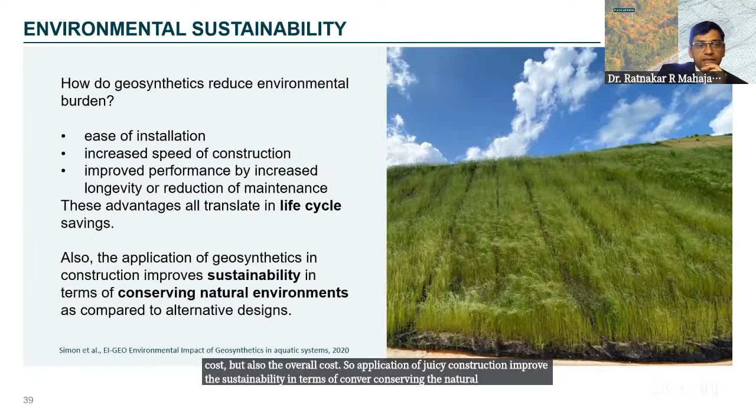So application of geosynthetic construction improves sustainability in terms of conserving natural materials like soil and the environment. It's important to go for a holistic approach to erosion control solutions. Most tested and tried solutions like MACMAT can be used - it's one of the best erosion control solutions. As I explained in the beginning, we need to approach it through an engineering approach, understanding the soil loss, and then selecting the solution. With this, I thank you for patiently listening, and over to the moderator.